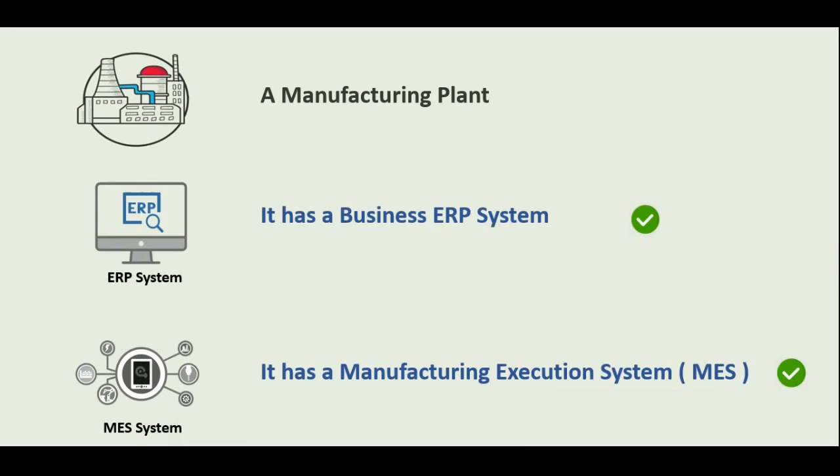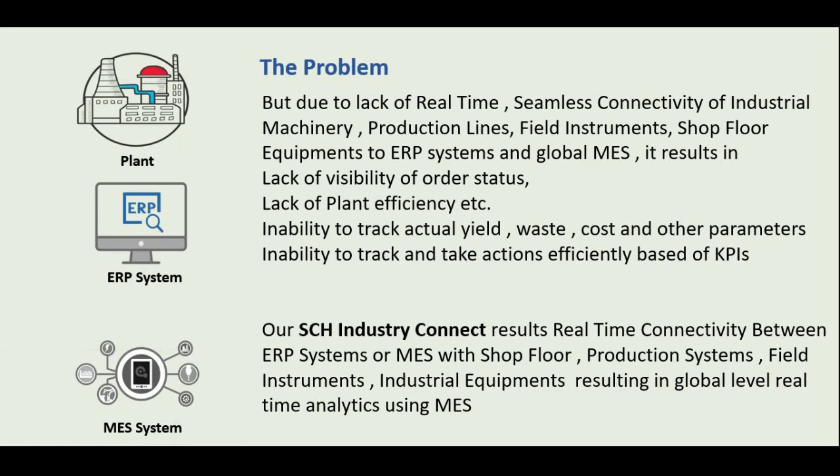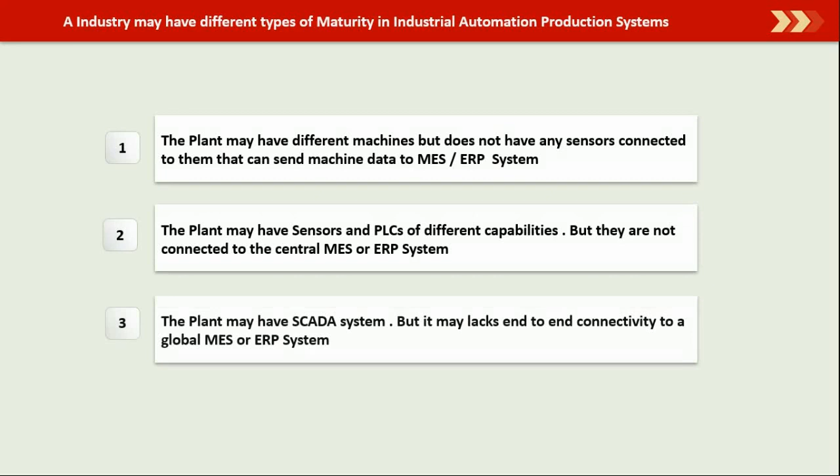The solution we are offering is called SCH Industry Connect. In order to do that, we need to standardize the communication protocol, and second is the ability to map the different maturity levels of the systems using this SCH mapper to the standard. The standard communication protocol can speak to, communicate to, different MES systems and ERP systems.

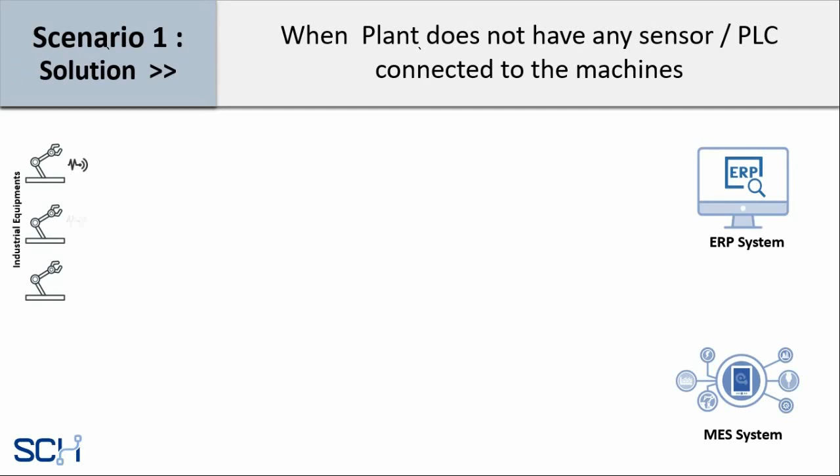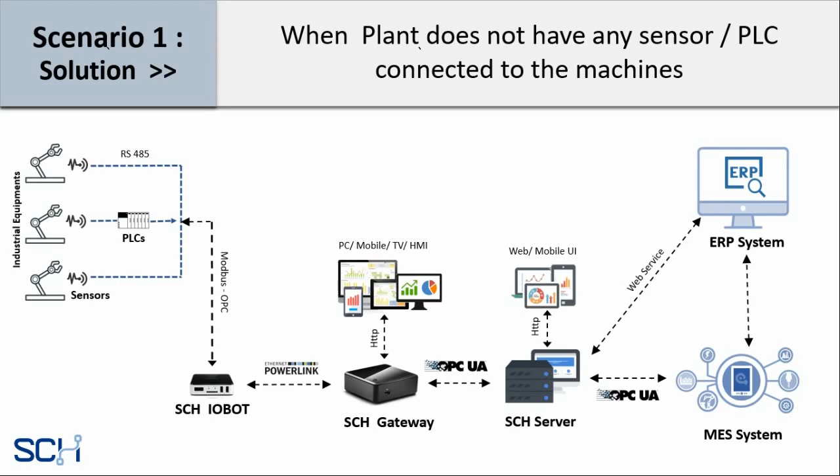So here, point number 3, we highlight the different maturity of the industry for different types of industries. We are presenting our solution for different types of industries, starting with the garment industry, and how the standards are used for communication protocol, and how it has flexibility to connect with different ERP or MES systems.

Out here you can see on the left hand side, we are picking up different types of industrial automation systems. It can vary all the way from fully automated SCADA systems to different categories of PLCs and the IO system.